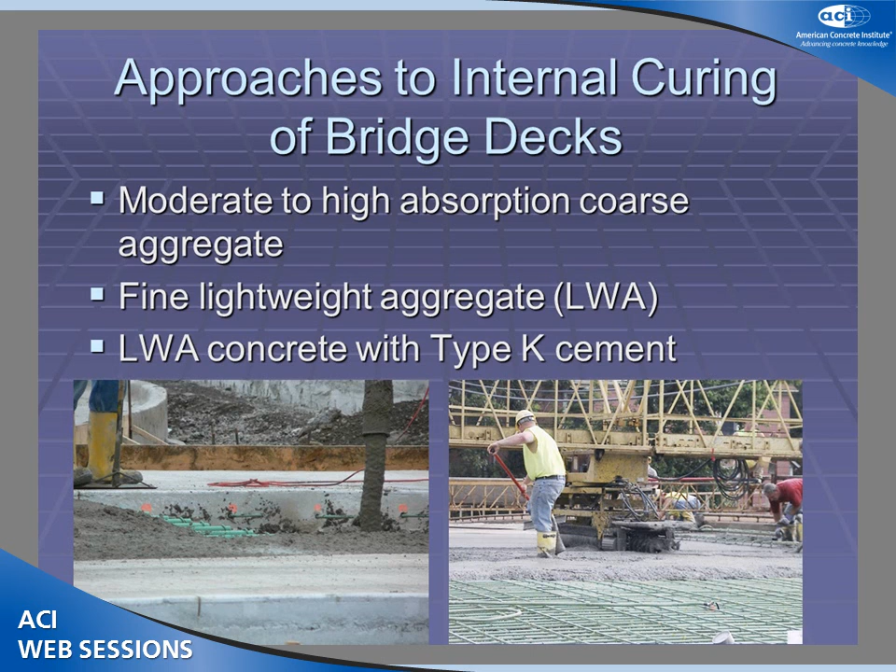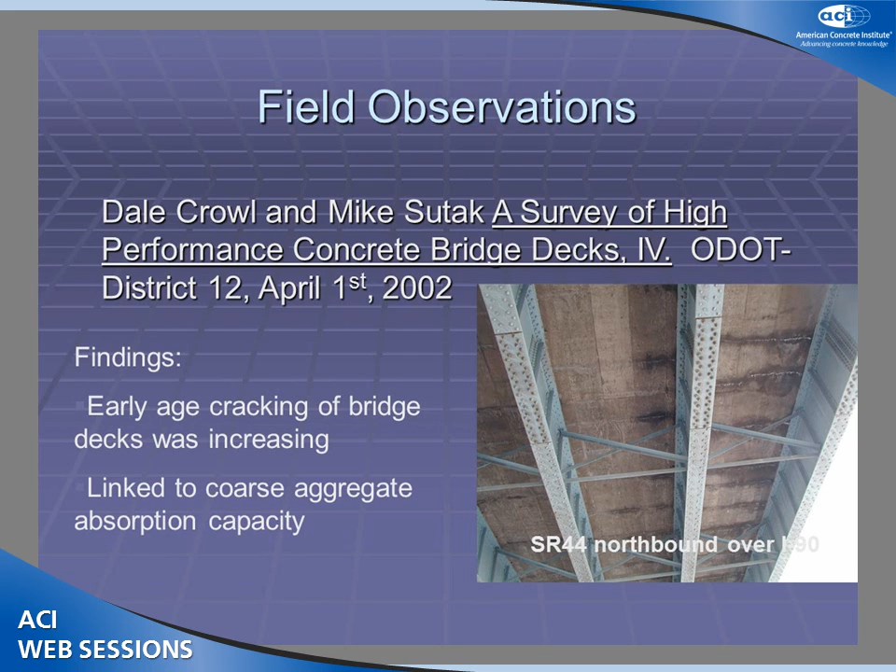So the genesis of this study and where I got the research project from ODOT is 2 engineers from District 12, Dale Crowl and Mike Sutak, undertook a survey of high-performance concrete bridge decks. And what they found in their survey was that the early age cracking of bridge decks was increasing, and they tried to find out why.

Essentially, this is what happened in ODOT District 12. Between 1994 and 1996, they built approximately 30 bridge decks, and only one of those showed any substantial cracking. Then they switched to high-performance concrete, starting in 1997. Between 1997 and 2001, 79 bridge decks were built, and 48 of those showed cracking, which leads one to wonder what sort of high performance we're getting out of that.

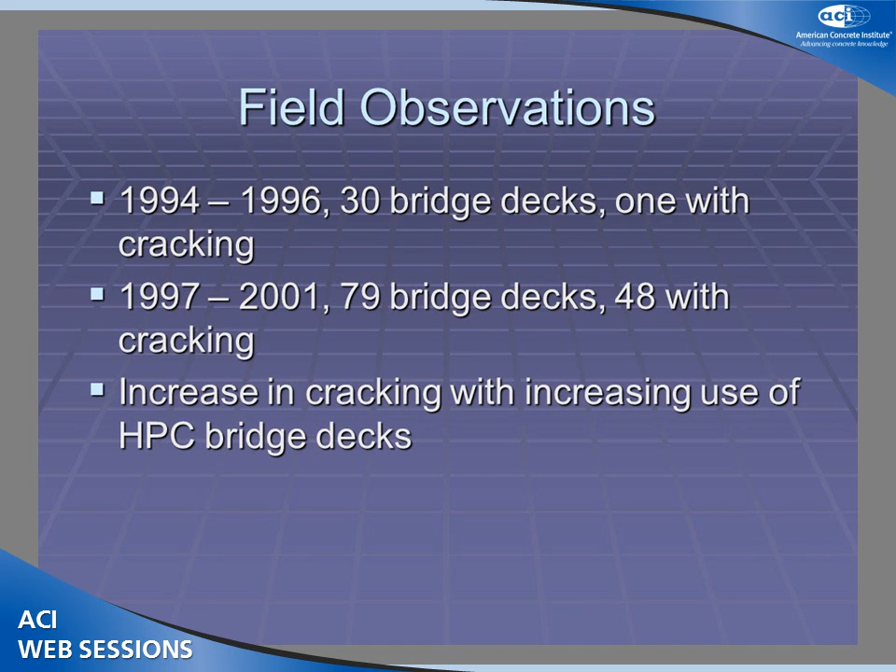So it was a big change, and they wanted to figure out why. What they did, which I really liked, is they started looking at, for these 79 bridges, what was the common factor between those that cracked and those that did not crack. The nice thing about bridges is you can walk around under them and look up generally and see whether or not there are cracks.

The first speaker actually had the picture on the right, and he only had 3 of my slides, so most of those are new. But with the standard mixture, the only thing that changed when they started looking at it: the ones that used size ASTM 57 and number 8 coarse aggregate with absorption capacity well under 1% tended to have some pretty bad cracking. On the other hand, bridges that did not crack looked like they had absorption capacity in the 2.5% and 3% range.

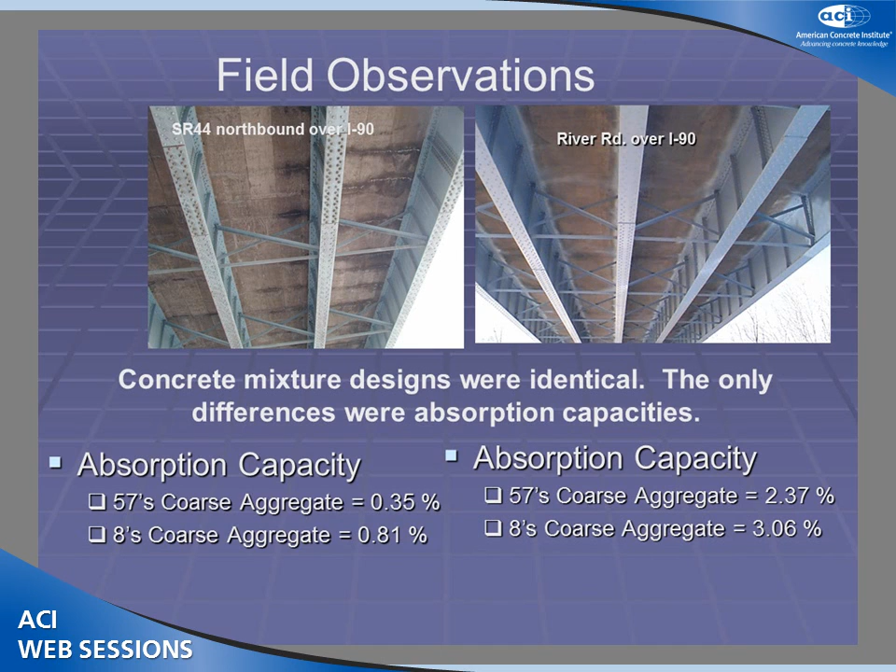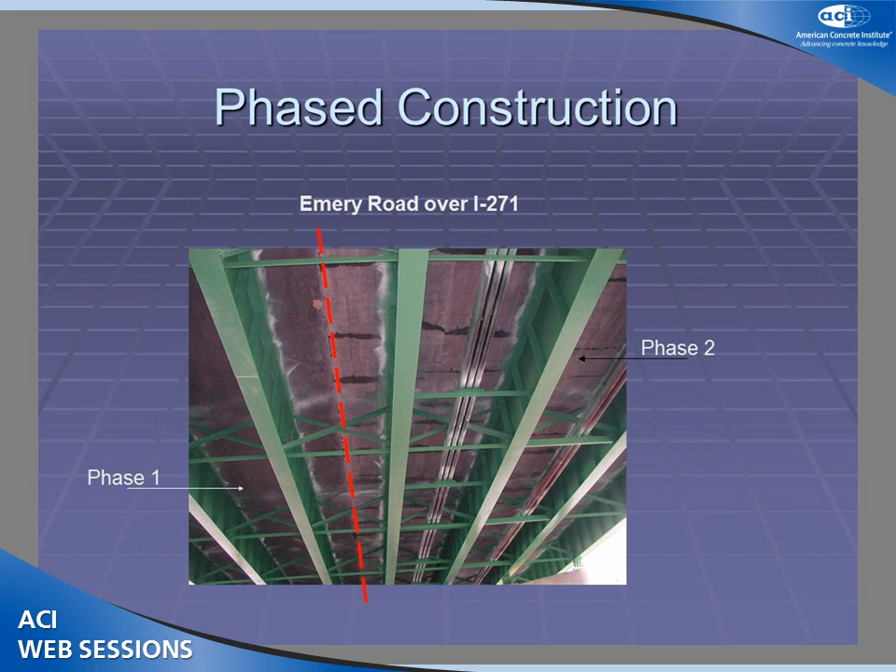This theory was probably best illustrated or confirmed in a project that had staged construction. You had the same bridge, same contractor working on the bridge, and half of it cracked while the other half did not. So what changed? Same contractor, same mixture proportions, same phase. However, the concrete plant had changed the source of the coarse aggregate between those two phases of construction.

The side that cracked had a relatively low coarse absorption, and the side that did not crack had about 1.5%.

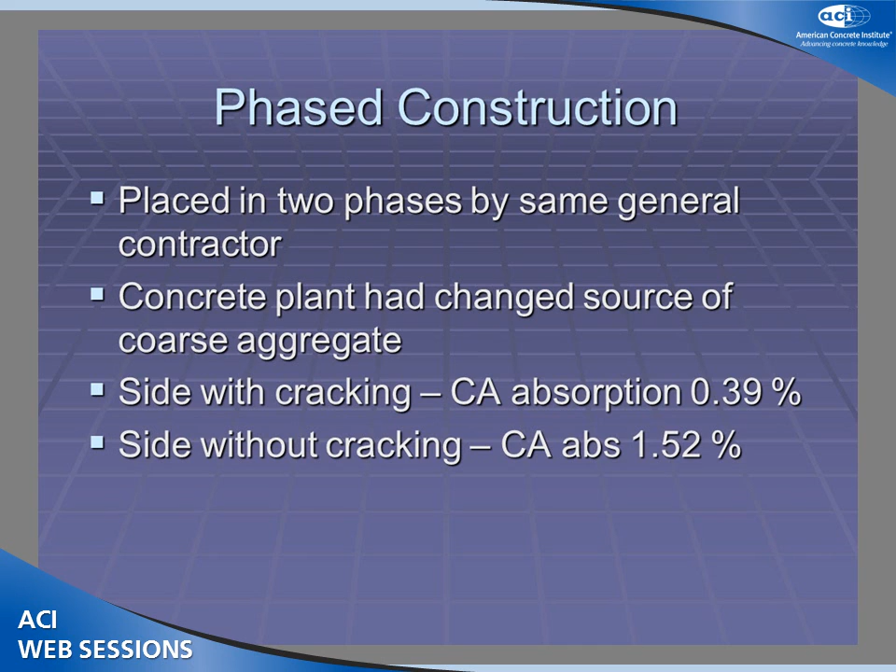On the basis of this information, ODOT District 12 made a number of adjustments, all of which made sense to me. Rather than using just one aggregate, they decided to try for more to fill in the structure, using a blend of 57 and 8 stone. When you do that, with a denser aggregate structure, you can reduce your water and cementitious materials content without having to change your water-cement ratio.

They changed their specification to only allow medium and high absorption aggregates. So they changed the specification pretty much - you could not use less than a 1% high absorption aggregate. In the new design, they also had a slight increase in the water-cementitious materials ratio.

Well, it's good engineering, but not very good research, because they fixed their problem, and from a research standpoint, they really didn't care. In terms of trying to figure out what the issue was, you changed four variables at the same time - your problem went away, but you don't really know which variable actually did that.

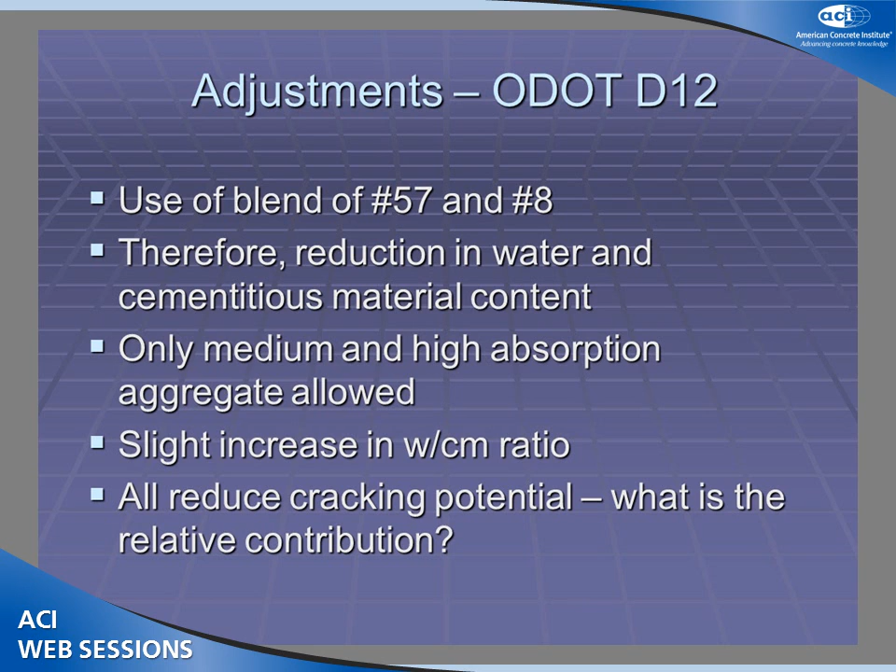So Cleveland State was brought in as researchers to look at this in the laboratory. We already had it - it's kind of interesting, sort of backwards. Usually you do stuff in the laboratory and then go out to see if you can replicate it in the field. Here we had field observations, and we were trying to back-calculate things from the laboratory.

We got some supplies of aggregates commonly used by ODOT from different sources - a low absorption, which is less than 1%; what we defined as medium absorption, between 1 and 2%; and then a material that was relatively high absorption.

In Northeast Ohio, they primarily used crushed limestone. The state wanted to look at this in a broader sense, and in other parts of the state they use river gravel. We could only find one with a medium absorption.

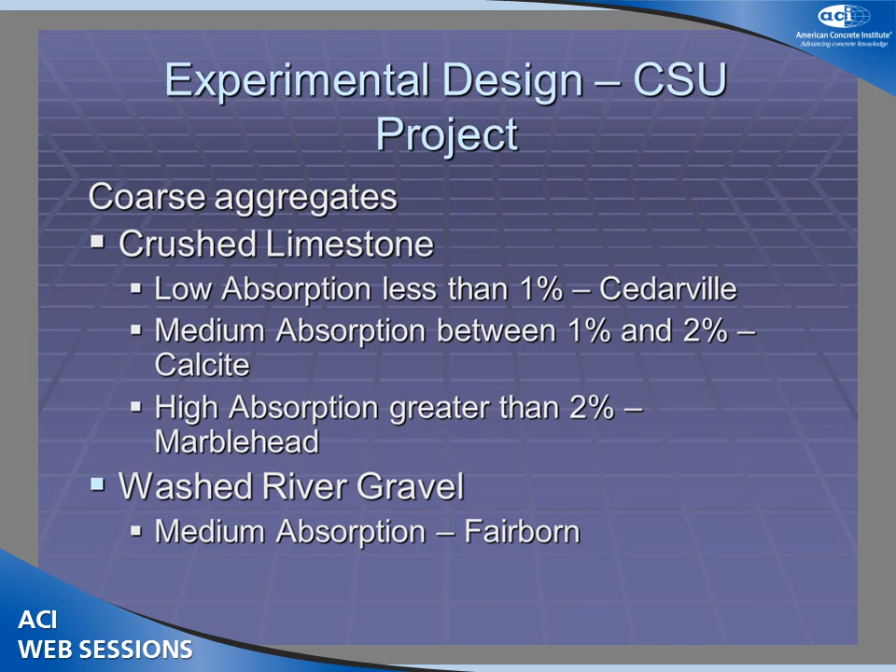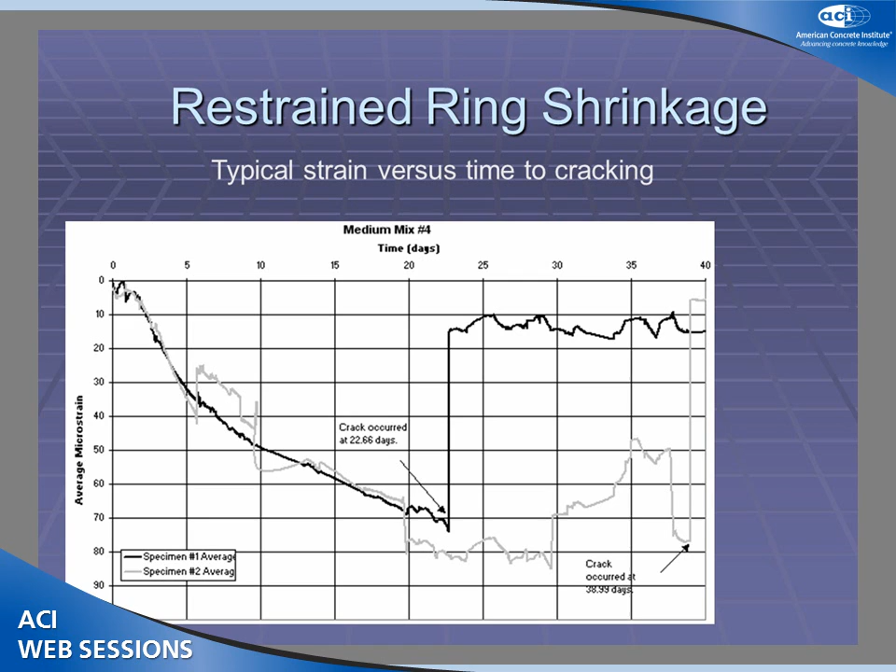We did a number of ring tests, looking at the time of cracking and so forth. Sometimes in the duplicate rings the cracks occurred together, and sometimes not so much. We crunched all the numbers and looked in terms of cracking potential.

The nice thing about this is at this time, BASF out in Beachwood was doing a number of ring tests, and they helped us with both setting up the test and some literature on how to interpret the results.

The problem is a lot of these tests are done on mortars, because you get results much more quickly, using relatively thin rings. If you want to test a 57 stone, you can't really use a thin ring - you have to go to a much larger ring, which means you need to wait longer. The results become a whole lot more confounding, so we tried to make sense out of that.

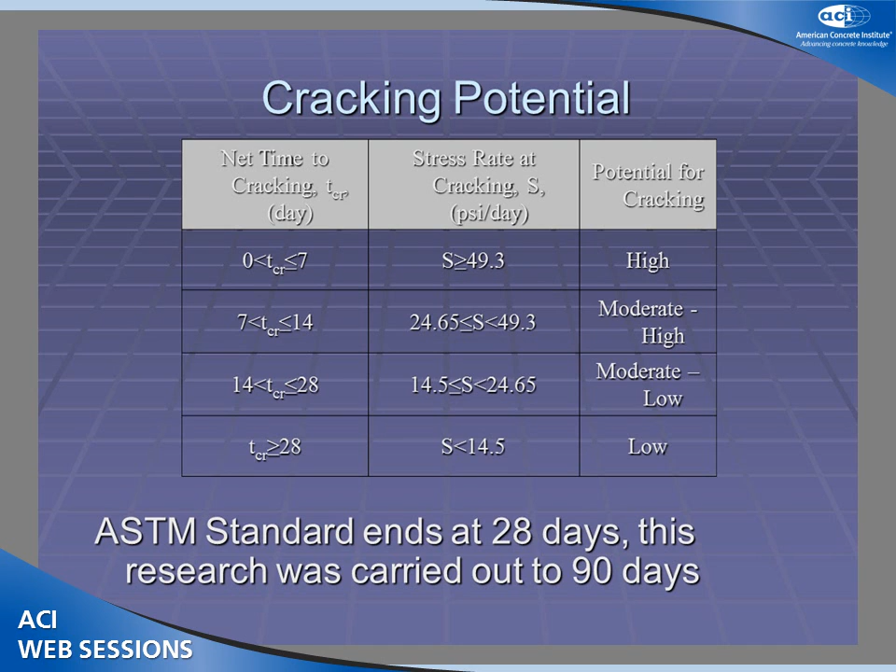We tried to look at whether our potential for cracking, based on time of cracking and the stress rate of cracking, was high, moderate, or low. When we put together all of the numbers, what we found is when we looked at the basic high-performance mix, as expected, the low absorption concrete cracked relatively early, and the medium absorption tended to take a good while longer.

One thing that was kind of surprising was that the high absorption aggregates actually also had pretty early cracking time. As near as I can figure, I don't think the field sample from ODOT had many of these. I think also when you get into aggregates that have high absorption, they may have weaker tensile strength.

When you look at cracking, you're basically looking at stress. Stress is chasing the strength, so even if the stress isn't all that high, if the strength is also low, you don't go anywhere.

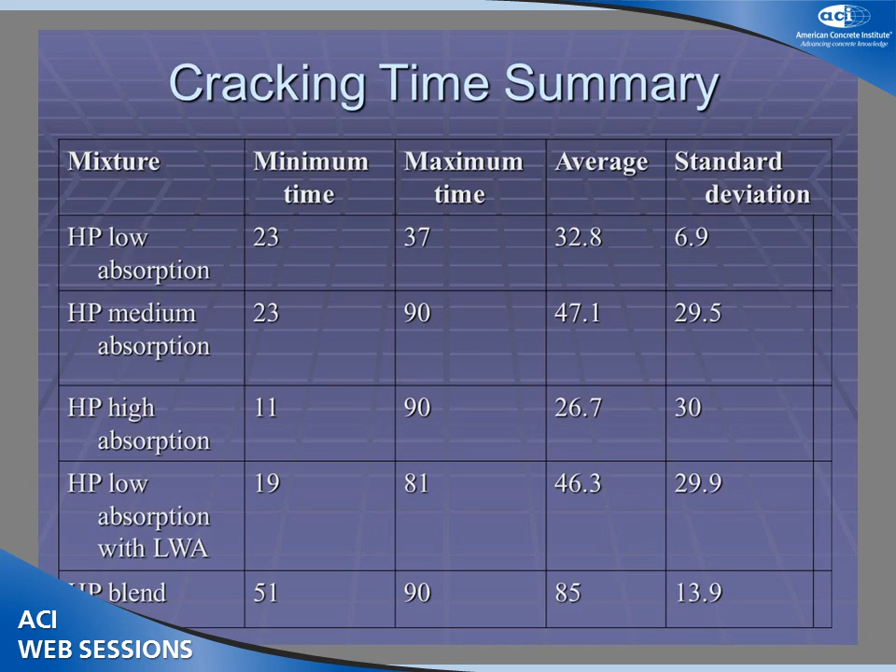What we did find is that when you included the lightweight aggregate, you generally can bump up about a category - you generally improve your properties. So we decided that looking at the data across the board, adding the lightweight aggregate, regardless of your original cracking tendency, tended to make that concrete more resistant to cracking.

The problem we had is we looked at 16 and 18-inch rings, and we used a correction factor for the 18-inch rings. When you go to an 18-inch diameter ring, it is a relatively thick donut of concrete - it's quite frankly kind of hard to get it to crack.

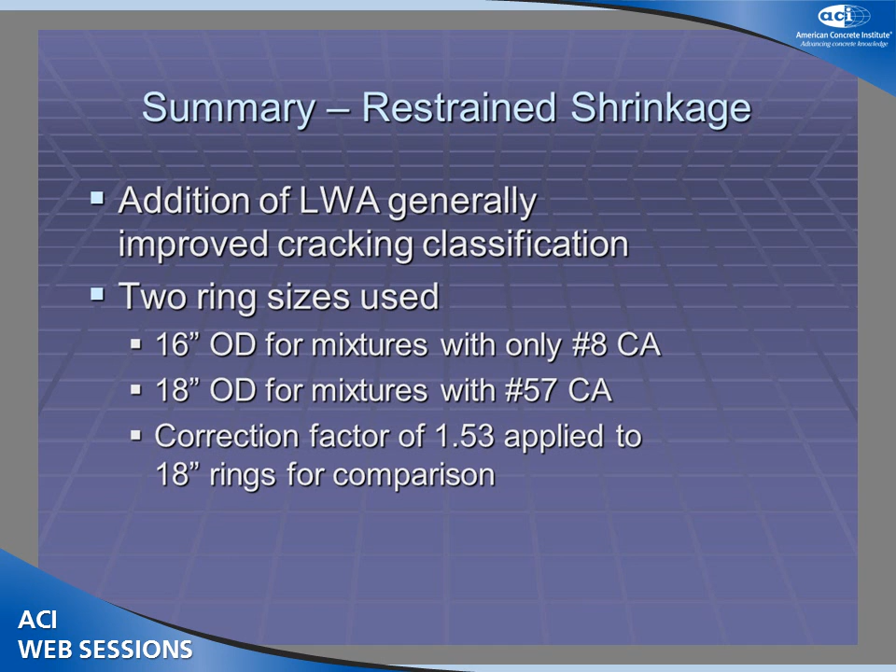The blending of the aggregates did help a lot in improving the resistance. And obviously, if you have a number 8 top size aggregate, which means you have more paste, you have a greater risk of cracking.

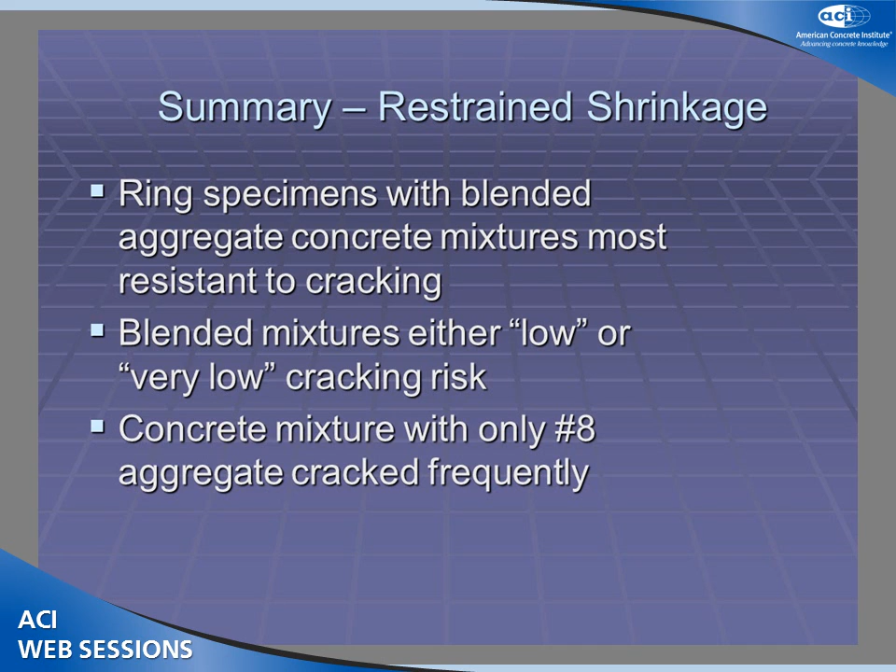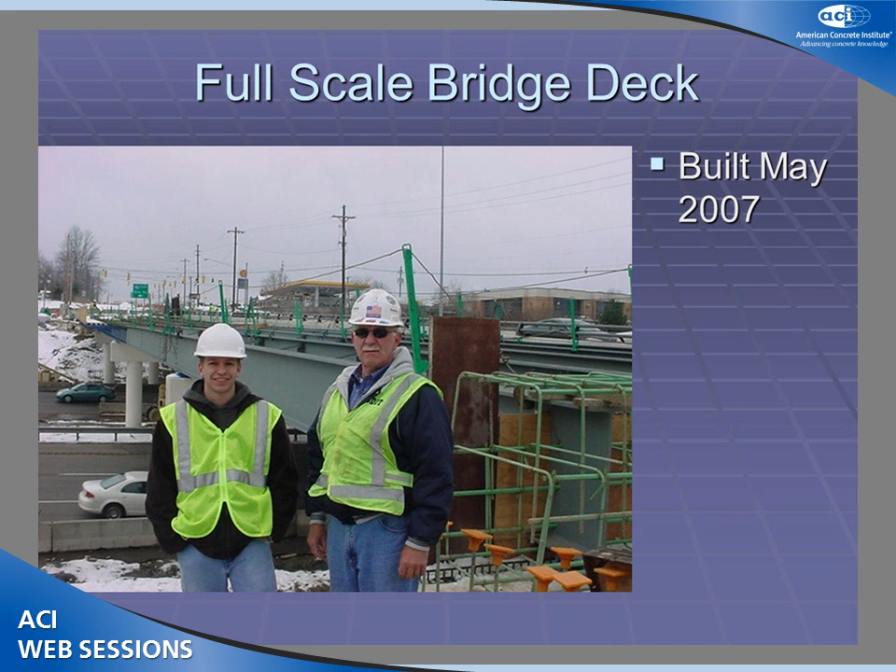We had a new bridge going up in Willoughby Hills, on the east side of Cleveland, and we did half the conventional ODOT modified mix to make sure that Dale had switched to what the rest of the state calls the Crowl concrete mix. Then we took the other half and added some lightweight aggregate to see how they would do. So basically, one side was a modified mixture using a blended aggregate, the other side we added the lightweight aggregate.

Both mixtures were pumped. Now, obviously, ODOT has no interest whatsoever in having a bridge deck crack simply to prove my point. So we basically took a crack-resistant mixture and another one that was even more crack-resistant, and we really did not see much in the way of cracking. In fact, I'm not even sure we saw any at all.

Their HP bridge deck mixture is really designed on a durability, permeability type basis. Their required compressive strength is 4,500 psi, and they routinely blow by that by 2,000 to 3,000 psi, which really isn't all that relevant for a bridge deck, because how many times have you seen a bridge deck fail in compression? It's always durability issues that get it one way or the other.

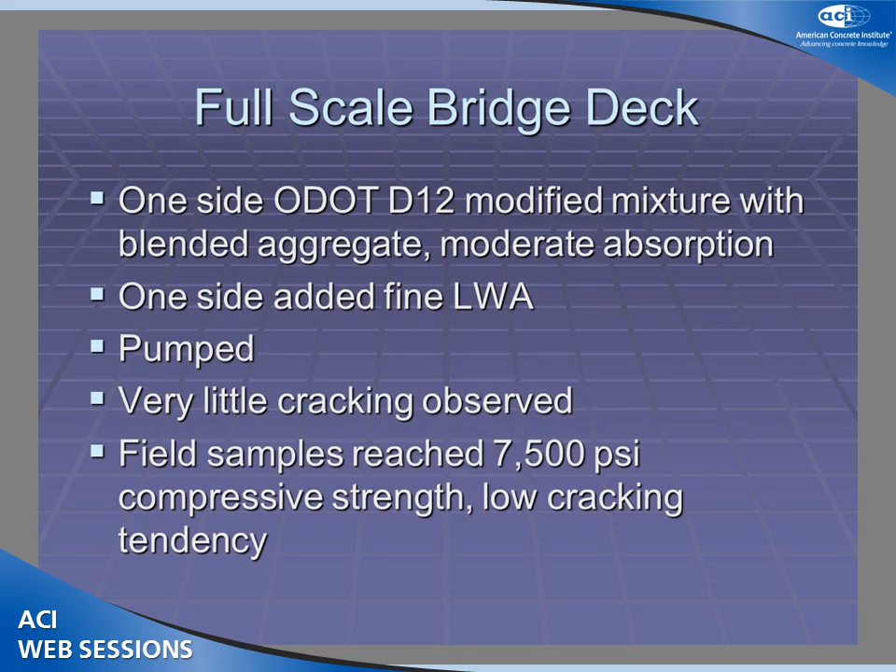So that is some pictures we took in the casting of the full-scale bridge deck. And then we had a small crack. We think there may be a small crack that showed up at about 5 weeks, but that could almost be an artifact of the light.

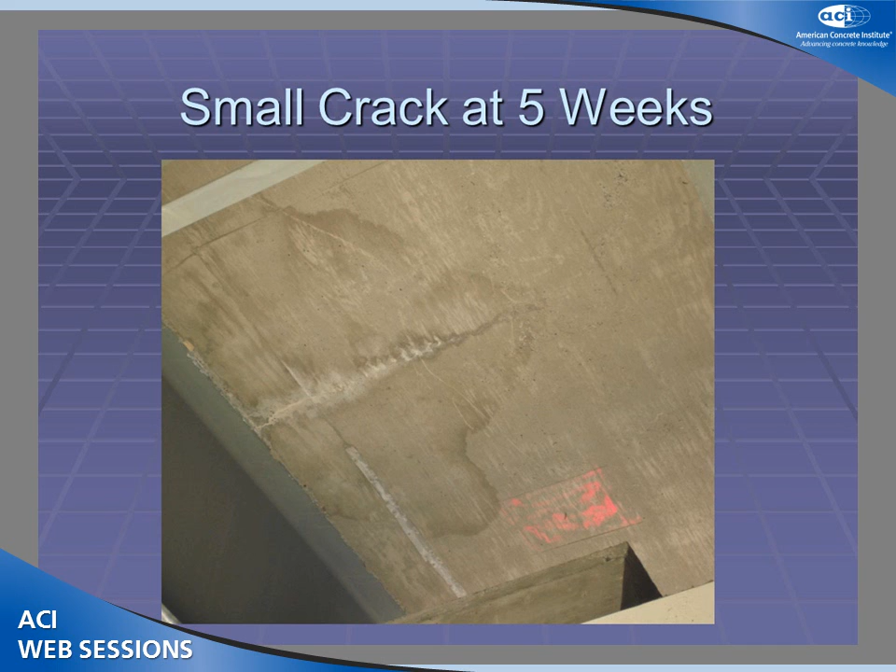So Dale and I put in the abstract for this, and then we realized at some point that, wait, the paper's due. Maybe we should go out and take another look at the bridge. I think you've seen that slide already.

I don't remember right now which side is which on this, but neither one of them cracked, at least as far as you can tell without risking your life and getting way out into Interstate 90. So all in all, that bridge is working pretty well from the material curing standpoint.

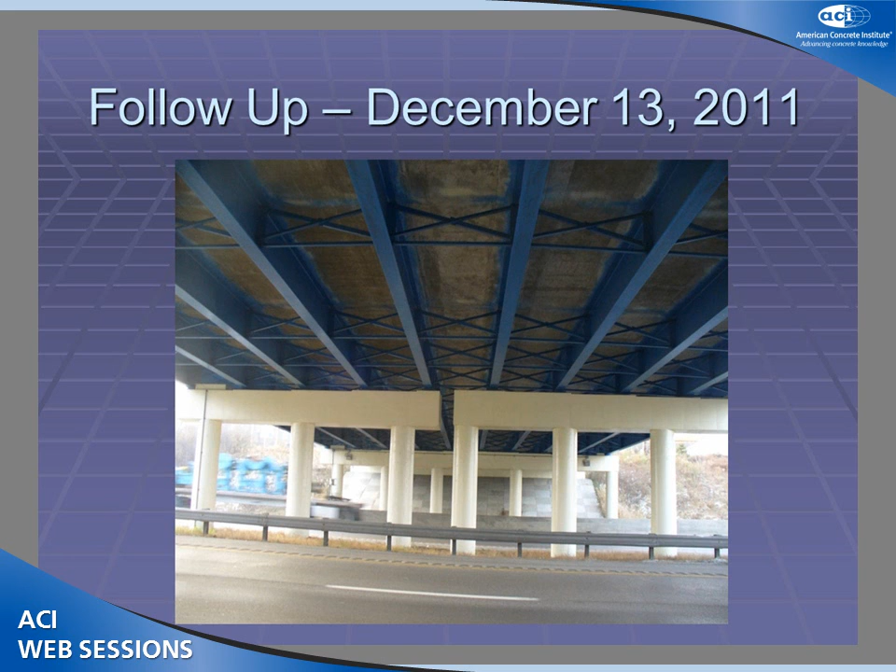The final one I want to talk about has actually been mentioned earlier by the late Bob Gulyas of BASF. Bob gave me a copy of his paper and a whole bunch of slides, and he said, you know what, you really need to go to ODOT and get some money into a research project on this. We need to figure out why this bridge worked as well as it did, and unfortunately it's something I never quite got around to doing.

So he wrote a paper in 2008 for a conference entitled High Performance Bridge Deck Use of ASTM C845 Type K Shrinkage Compensating Cement with Lightweight Aggregate to make good concrete. I'm not going to go on with the rest of it - very long title.

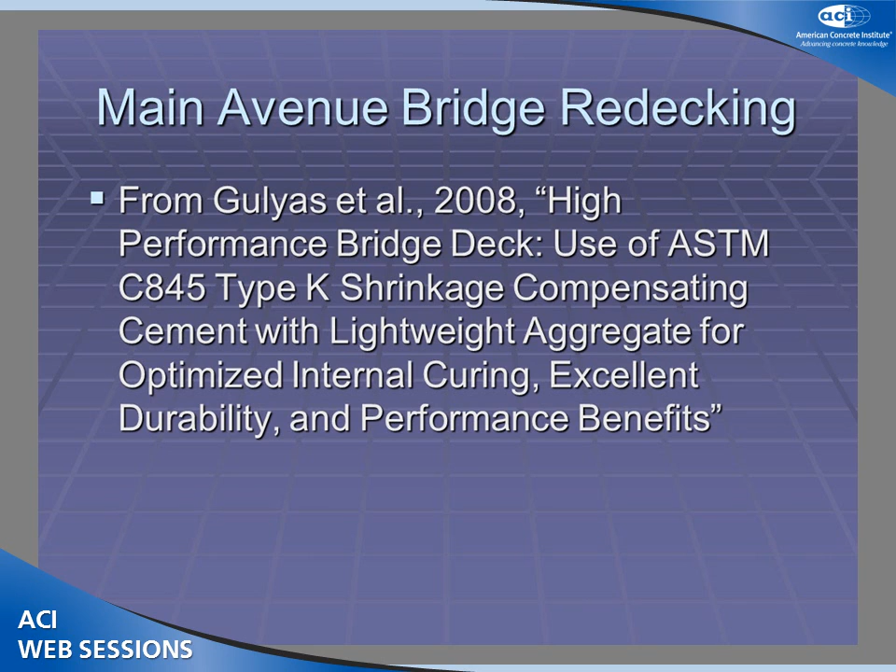The Main Avenue Bridge is in downtown Cleveland across the Cuyahoga River. It was redecked in 1992, using a sand lightweight concrete deck. Now, my understanding of the bridge is that this was not done for any purposes of internal curing. The redecking of the sand lightweight concrete deck was to allow you to reduce the dead load so you could add traffic in each direction without having to strengthen the bridge.

My understanding, I think I've read some recent articles that we have some concern about the capacity of this bridge, but all from the steel understructure of the bridge.

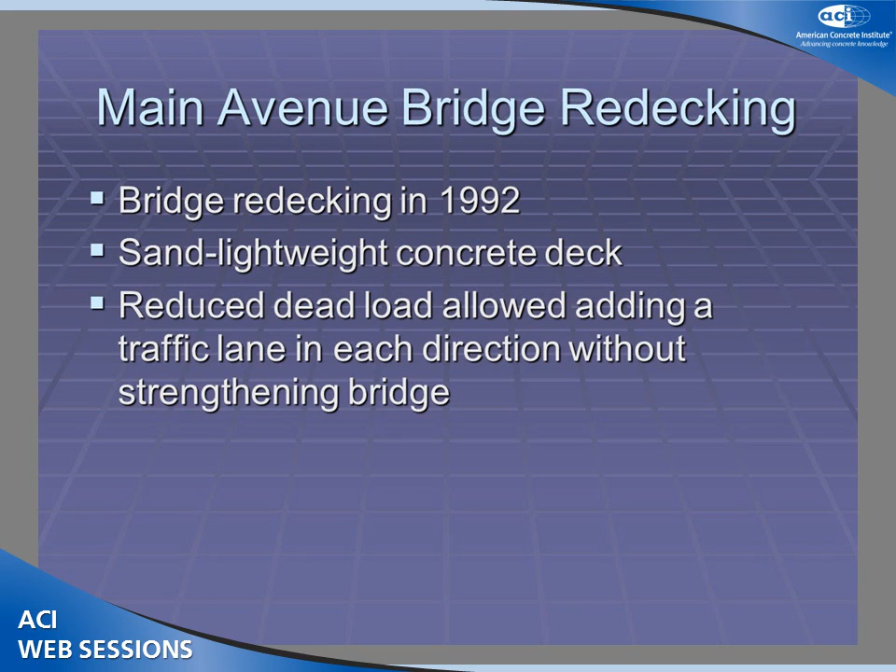So the materials passed on to me from Bob. The concrete mixture was about 715 pounds per cubic yard Type K cement. In the expansive concrete session yesterday afternoon, they talked about this bridge in Bob's paper, this presentation, and also between 1985 and 1990, ODOT, and I think the entire turnpike, continued with this, built more than 300 bridge decks with Type K cement.

And those seem to work pretty well. Considering that they've gone probably a couple decades without any serious bridge deck cracking problems, you can see why they're even more concerned when they switched to HPC and had these problems.

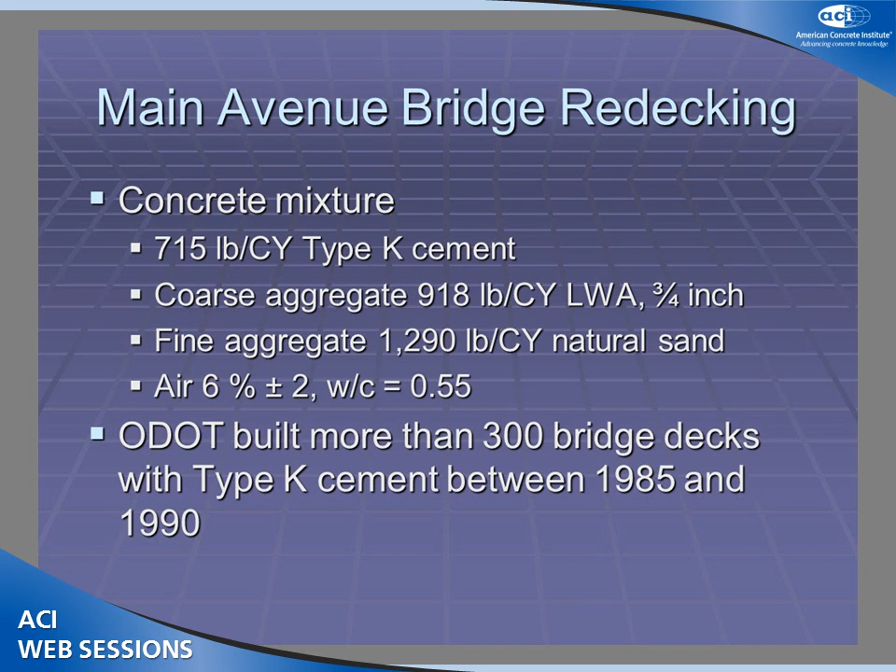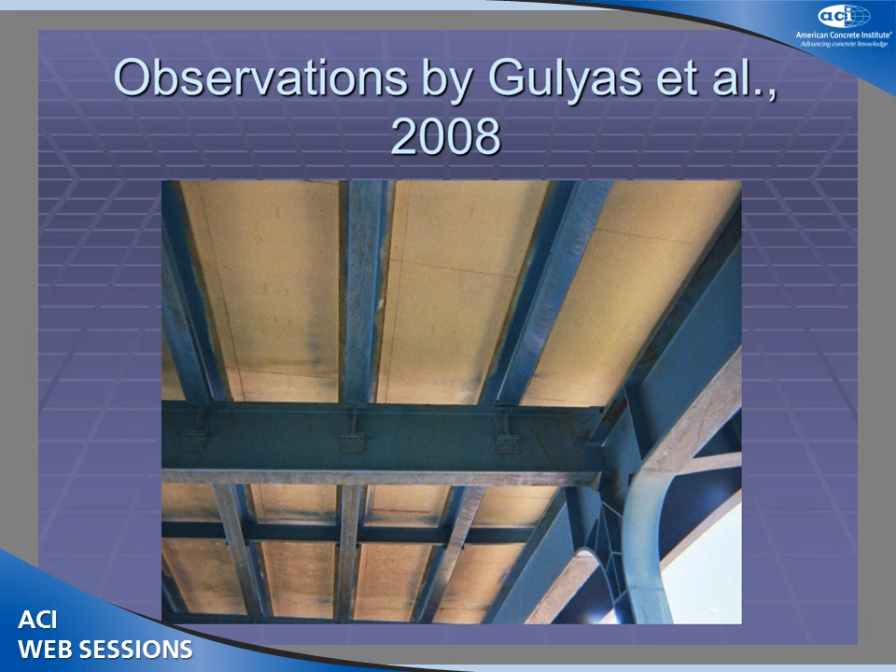The coarse aggregate was 3/4 inch lightweight aggregate, air, relatively high water cementitious ratio of 0.55, with a fair amount of Type K cement. Bob Gulyas took this photo of the underside of the bridge and reported on that in his paper in 2008. At that point, the bridge deck had been in service for about 15 years.

Let me point out one thing about the location of this bridge. The greater Cleveland area has a wonderful combination of lots of bridges and some really nasty climate conditions with freeze-thaw. If you want a place to do bridge durability experiments, you can hardly come up with a better place than Cleveland. This particular bridge is actually pretty close to Lake Erie, so we get a lot of the storms that blow in off of there.

So after 15 years, I do see a lot of concrete deterioration in Cleveland. It's a great place to take classes for field trips about what sort of problems you can have. And after 15 years, excellent condition, no cracking. Most of it, unfortunately, has stay-in-place forms, so there aren't that many places you can look at it from underside. Dale and I went around, took a look, and pretty much ended up in the same place that Bob had been able to take his photos.

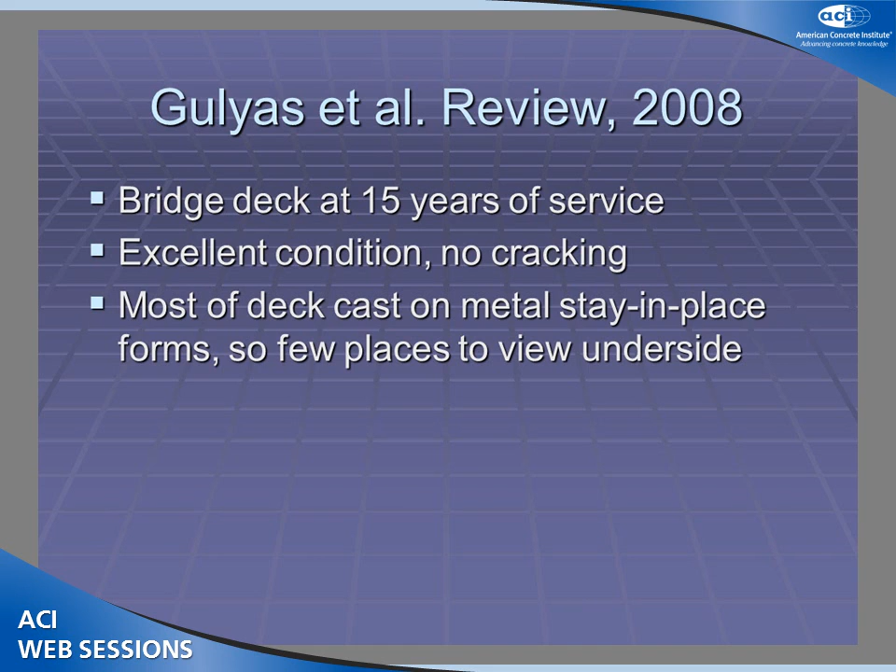So, with the paper due, Dale and I got in the ODOT vehicle and continued on out to this one, and the bridge deck is still in excellent condition. There's no cracking, spalling, no issues with freeze-thaw damage, no scaling.

What's interesting is you can almost tell where this starts by the deterioration from the approaches, because you go out on these approaches, which are conventional concrete. Now they may be older, but they are all chewed up. They have all these problems you'd expect to find in this area. And then you get on the bridge deck and it looks great. Then you get off and you're on the approaches, and those don't look so good either.

And even in December, which is relatively early in our season, we had little accumulated piles of road salt already on the edges of this. So you know that this bridge is subjected to just a ton of salt. Cleveland, by the way, has a salt mine under it, Cargill salt mine, so we don't have to take it very far. We just take it straight up from the mine and right on the road. And it eats concrete, it eats steel, it eats everything.

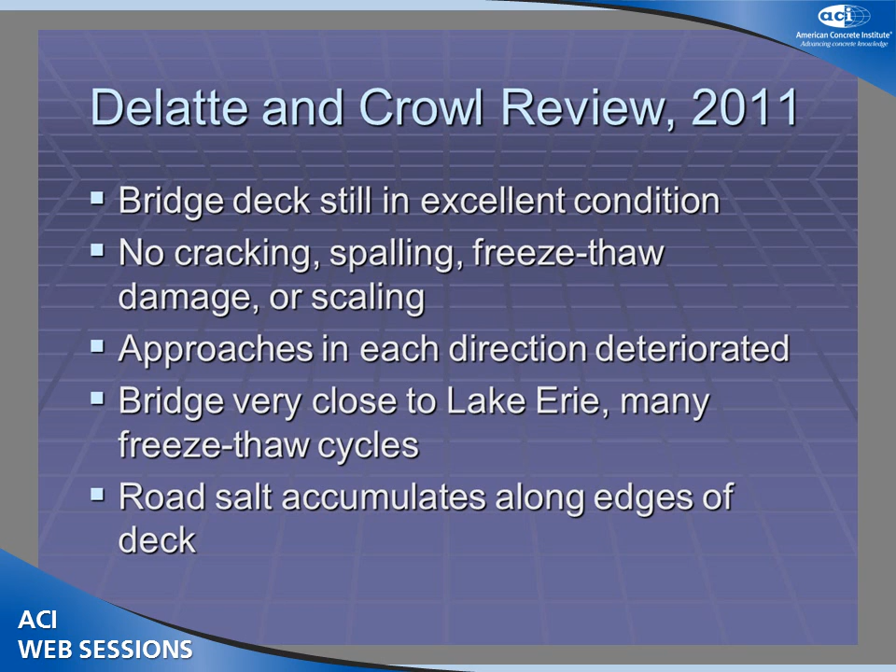So basically, these are my conclusions. I agree with many other people that say that internal curing is effective. We have seen some variation in the absorption of the aggregates that can be helpful in some cases. When I finished my study, I almost had as many questions as I started with. But our lab studies confirmed the field results, and I think they didn't see the problem with higher absorption because they just didn't routinely use those materials.

Our full deck bridge test is only 4 years old, still in great condition, but if there were problems, they would show up later. The Main Avenue Bridge with the Type K cement is in excellent condition now after 20 years, in a part of the world where concrete shows its age very, very quickly.

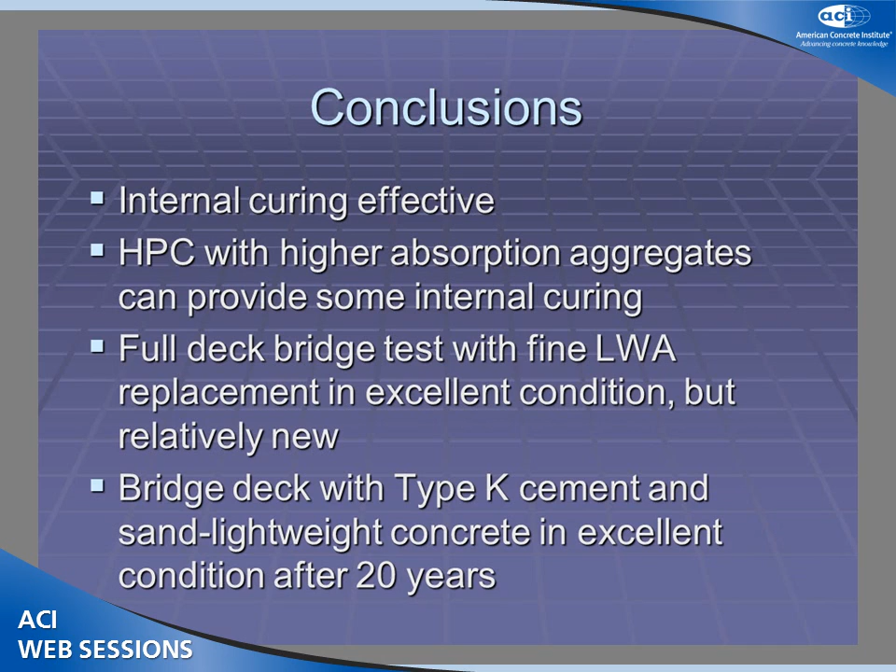So I think there is a lot of potential to look at some of these expansive and shrinkage compensating concretes combined with the lightweight aggregates and see if you can deal with some issues. We haven't really looked at the effect on freeze-thaw. I understand other people have, in terms of fatigue, wear resistance, and permeability. And I really think a place that we could make a lot of use out of internal curing is thin overlays on both bridge decks and on pavements that are known to be problematic from the standpoint of delaminations.

Those of you who were at the TAC breakfast may remember Blake talking about the new repair code and the problem that most repairs only last about 5 years. And a thin overlay is a very big repair, and we don't have the world's best reliability history with those.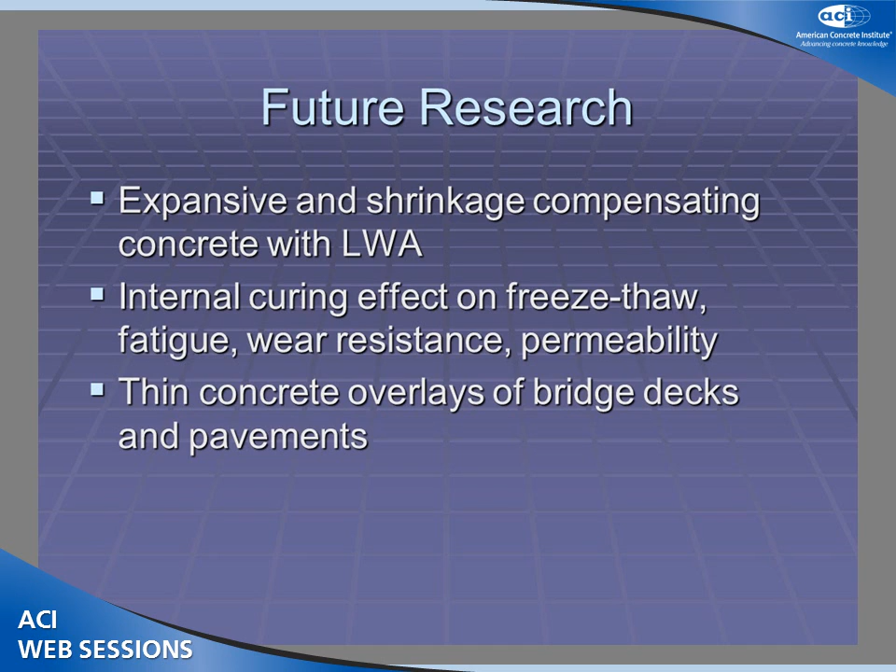But he did provide some good information and impetus in looking into that bridge. We do a decent job of studying our failures, but we tend not to do that good a job of studying our successes. If we built things that perform very well, I think those deserve just as much of a forensic investigation, so we know what we're doing right and can replicate it, instead of changing the specification and going from a situation where we have maybe one bridge in 30 cracking until all of a sudden over half of them crack in the process of improving what we're trying to do.